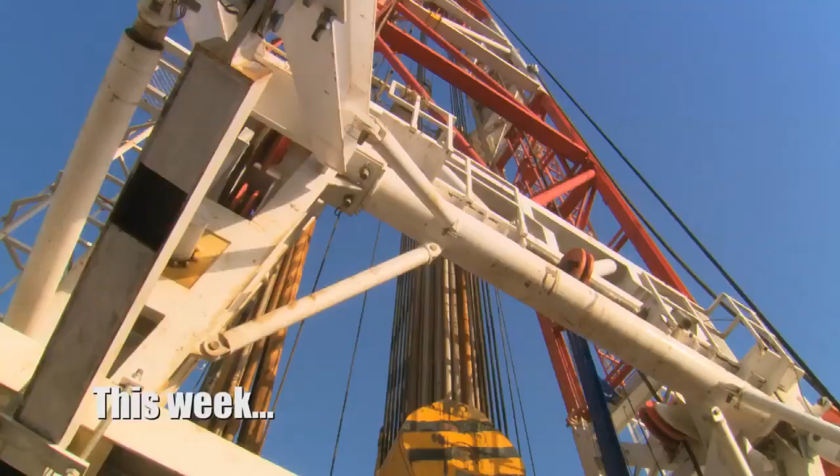It's the toughest job Russian oil giant Lukoil have ever taken on. Below ground, one of the world's largest remaining untapped oil fields. Above ground, a whole infrastructure that must be built to get the oil pumping.

You put your attention on this area. Yes, okay, that's good. But you forgot about others.

With inexperienced crews: Bring it back! You can't come up! You're crazy!

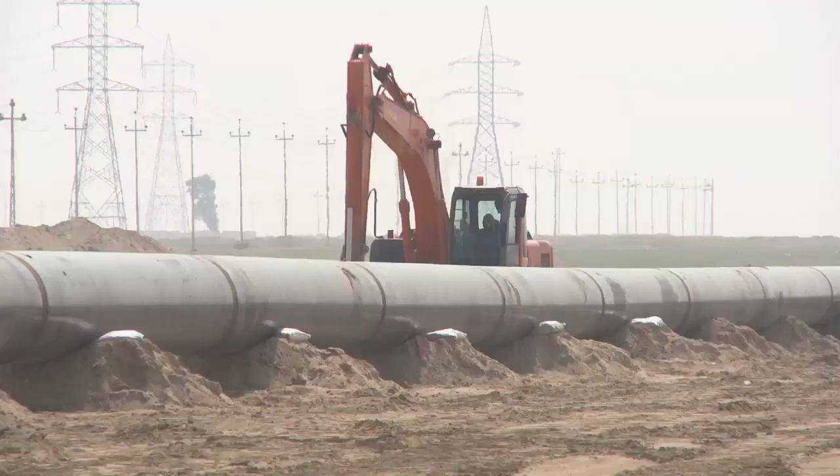With vital equipment held up in port. Your inspector is sitting here without any welding tools.

Battling contractors who are falling behind schedule. Talk it through, find out what the answer is and make it happen.

In one of the most hostile environments on the planet. Any type of incident happens en route, i.e. small arms fire, you'll hear a shout from the front to brace, brace, brace.

And they've got to get the oil pumping in record time.

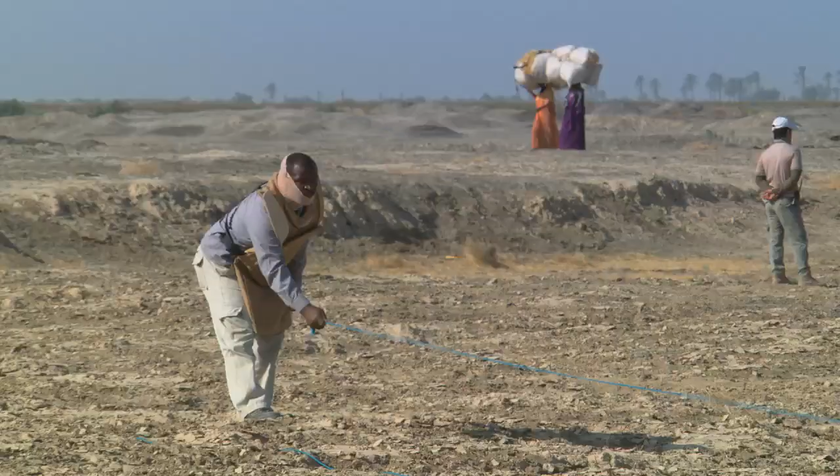It's early January 2013. This is Lukoil's West Qurna-2 oil field near Basra, Iraq. It has an estimated recoverable reserve of a staggering 13 billion barrels. Once up and running, it'll be enough to keep this oil field pumping for 25 years.

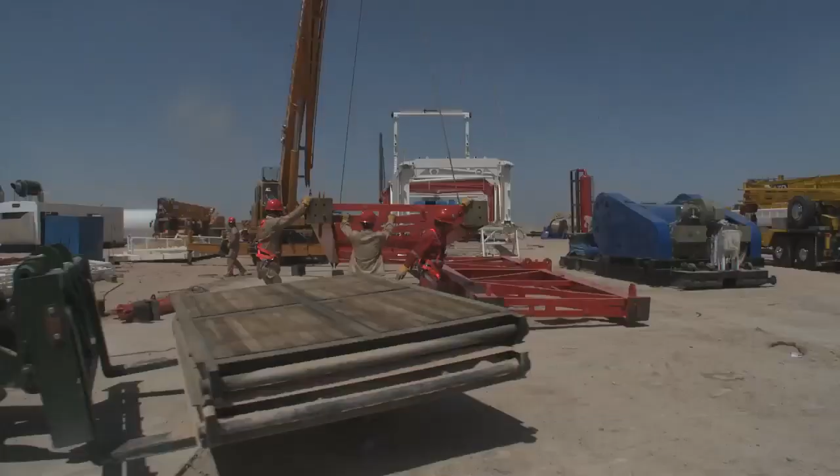It's just 10 months before Lukoil must produce what's called first oil. That's the date in November when they must pump their first batch of 150,000 barrels per day.

Lukoil are building everything on former marshland.

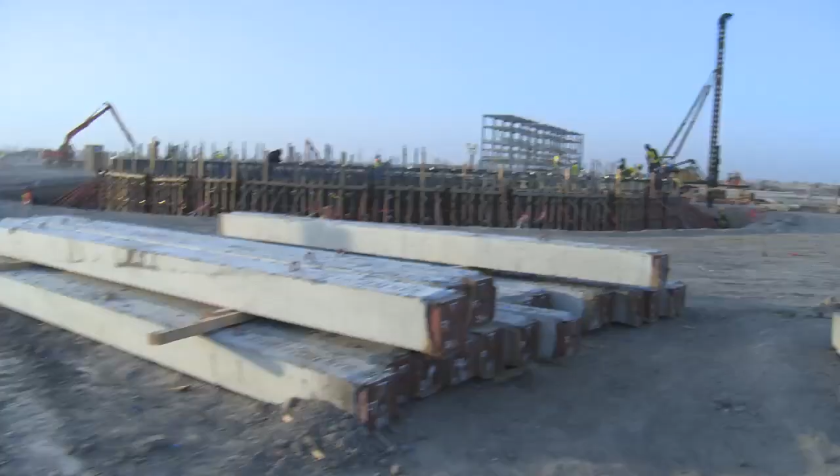So this is the phase 1 on-spec tank. Tell me about the schedule - is it on schedule or not? This one is a little bit behind schedule actually, isn't it? A little bit, how much? What's your expectation? As for tanks that we can catch up, 2-3 weeks behind, especially the second priority tanks. Our furthest advanced tank for this area is the first off-spec tank, which has the template installed, and we're ready to now pour the ring wall.

Sergei and his colleagues are inspecting the site of what's called the Central Processing Facility, or CPF.

The CPF is the beating heart of the project. Its scale is enormous - it covers a site 2.5 kilometers square. It uses over 1,000 kilometers of cabling, and it contains 70 massive vessels in which the oil is cleaned of water, gas, salt and other impurities before being sent for further refinement, storage or export. When it's fully up and running, the CPF will be able to process 400,000 barrels of oil every day.

There was a delay here, yeah? Yeah, there was a slight delay because the orientation of the template on top wasn't supervised correctly and they had to reshuffle it - so we lost a week.

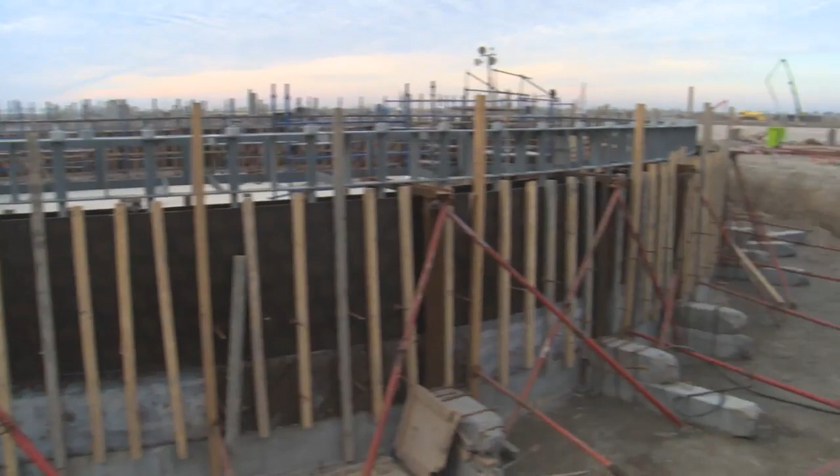Building the CPF will cost over $1 billion - the single biggest expense on the whole project.

You put your attention on this area. Yes, okay, that's good. But you forgot about others. You solve one problem, but you got another one.

They generally say that there's not that much delay. We're going to catch up.

Sergei and the Lukoil team are finding delays everywhere, including here, where water cooling towers that are used in the oil cleaning process will be built. The piles are in place, but the foundation has yet to be laid.

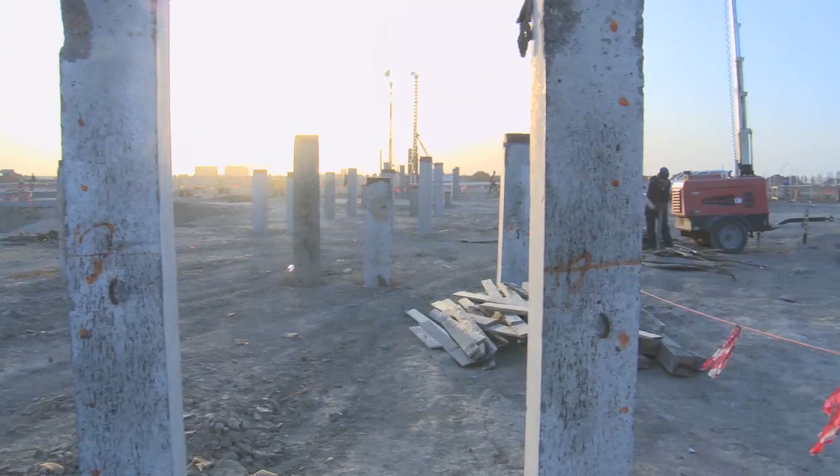All the equipment foundation, based on the delivery of the equipment, will be met - okay, so required on site. Yes. The major equipment arrives May, June. Yes, but starting from, as per the current schedule, from the late weeks of March, so we'll be prepared for the foundation.

It's time for Sergei to lay down the law. Tomorrow I kindly ask to report not in general - yes, each exact location, facility by facility. Yes, facility by facility. Yes, activity by activity. Yes. What is the situation in each site, okay? Yes.

This is the cause of most of the hold-ups: Umm Qasr, Iraq's biggest port. It's through here that almost all of the supplies for the oil field must arrive.

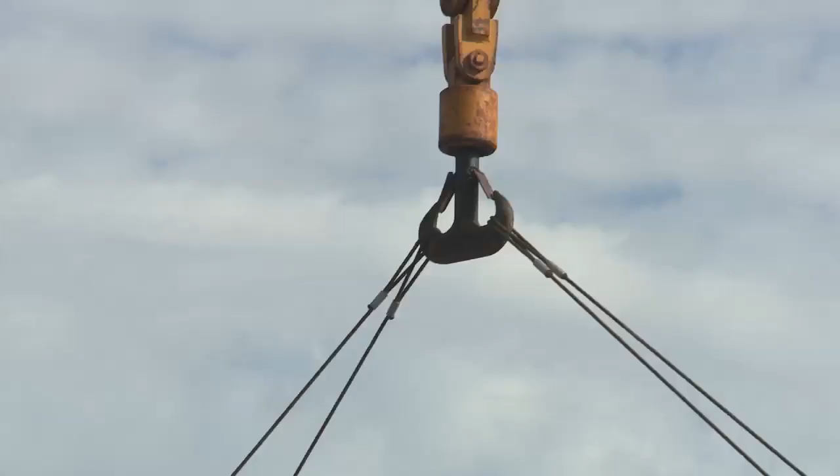This year alone, Lukoil will import 75,000 tons of equipment through Qasr. And not just Lukoil — Shell, Chevron and other major players in the oil industry use the port too. That's creating a major bottleneck.

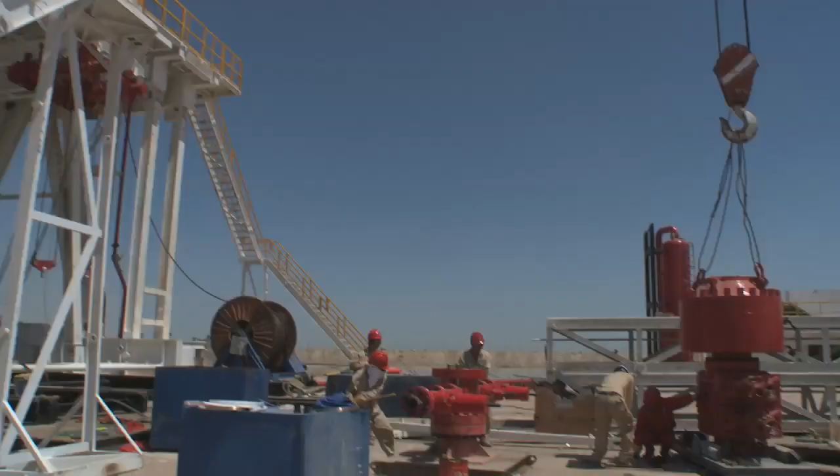One thing that is under the control of Lukoil is the speed of the drilling, but that's run into problems too. The guys are not drilling fast enough. The answer? Bring in 2 experienced rig coaches.

If anyone can whip the crews into shape, it's these two guys. Between them, Nordine Essahan and Herwert Dietrich have been working on oil rigs for over 50 years.

Nordine and Herwert set off to visit their rigs for the first time. These guys are the roughnecks, and they're new to the job. They're taking 50 minutes to connect each section of the drill pipe, a job that should be done in 4 minutes.

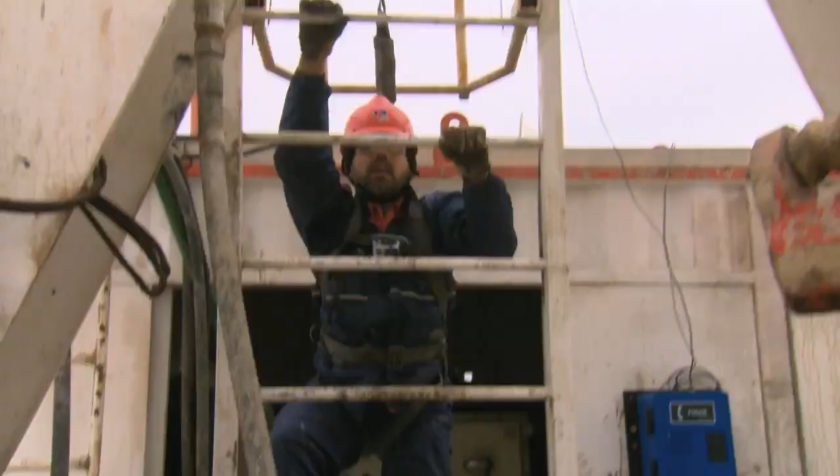This is the derrick, which supports the crucial drilling equipment. A roughneck climbs to the top — it's his job to get each new section of the drill pipe ready.

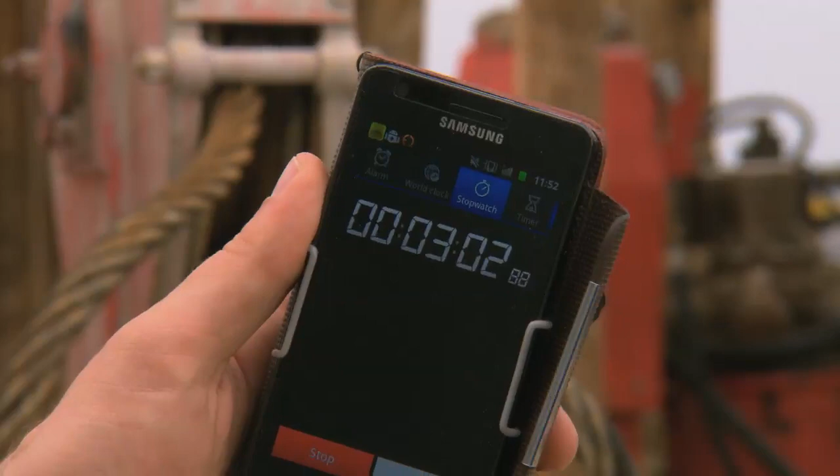100 feet below, the drill pipe is manoeuvred into position. Time they're doing good, they're following my procedure, they're listening. Power tongs will screw the two sections of the drill pipe together.

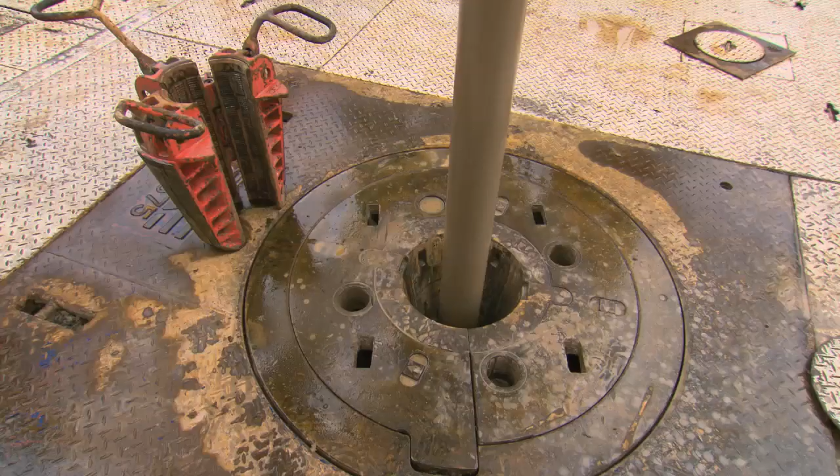It comes in 5 minutes. Under Nordine's expert direction, the guys have made extraordinary progress, but it's still not good enough. We have to do the connection faster to save money.

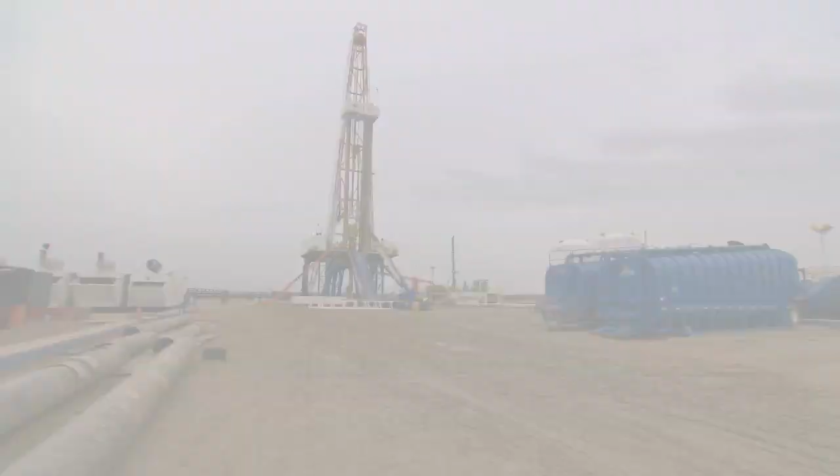On Herwert's rig, the crew are already 8 days behind schedule, and they still haven't completed their first well. And now the guys have run into a major problem.

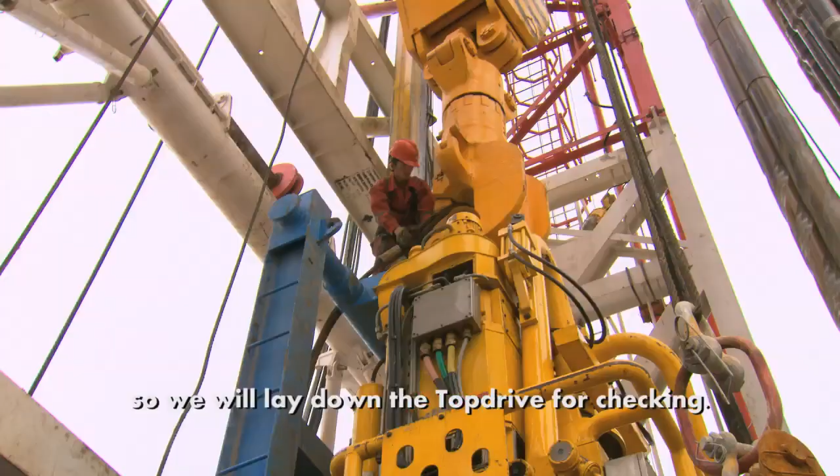The drill is powered by a huge motor called the top drive, but the gearbox on the top drive is broken. We have a problem with the top drive — he will not rotate, and we will lay down the top drive to check him.

First, a pulley lowers the top drive to the rig's floor, then onto the ground. A team of mechanics will then open it up to see what's wrong.

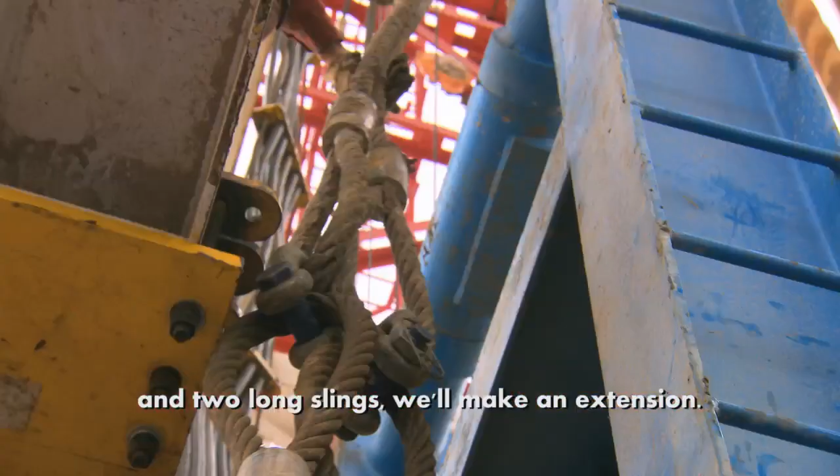Okay, slowly up. Yeah. Okay, now the other one, this one.

When it falls down at height, 20 meters, maybe more than 100 tons — when it touches the rig floor, we will kill the people, the equipment will break down. The team proceed with caution. Lukoil insists on safety first on all their rigs.

It's a 15 ton sling, we have here 30 tons, also double safe. So Hervart needs to check the crane can take the load.

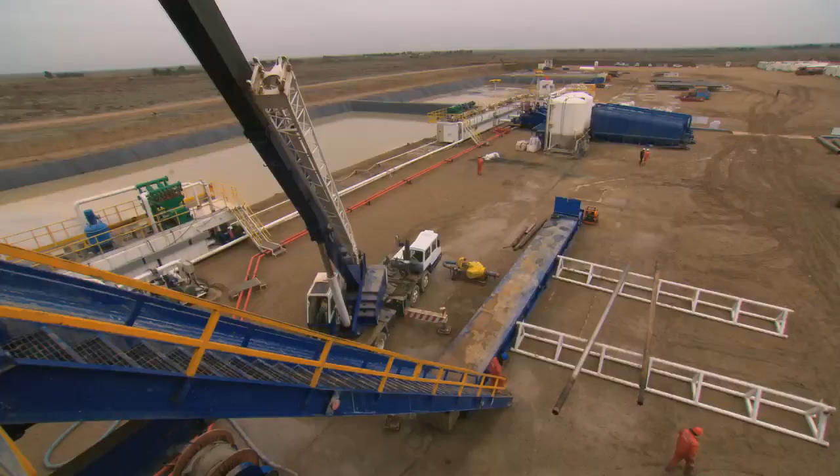You can see here, this one is a digital weight indicator. It's a very important gauge — we will see the load, the weight from the load. And when this is not working, we will not use this crane. It's very important, they need to get a new crane. But in Iraq, something as straightforward as ordering a new piece of machinery is never that simple.

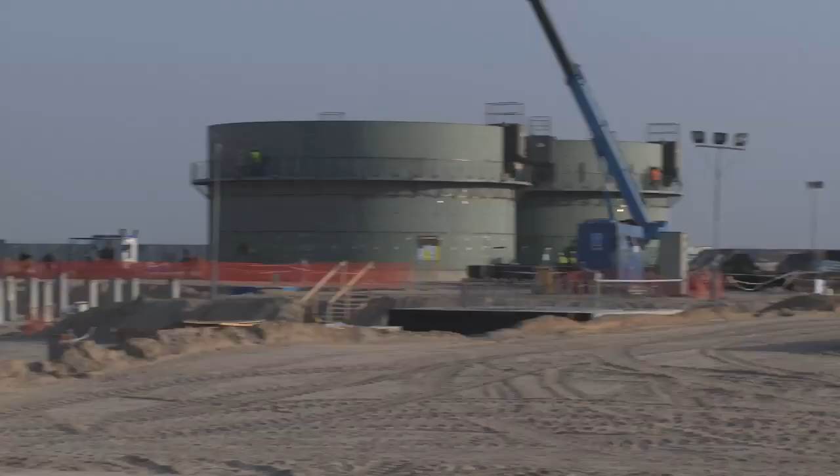Lukoil's giant West Qurna 2 field is one of the most ambitious projects ever attempted in the oil industry. Providing the power to get the oil pumping is going to take a colossal amount of power. With no existing infrastructure, there's only one thing to do: provide your own. A huge power plant is being built on site. Gas and air will be heated inside 3 enormous custom-built turbines to generate electricity.

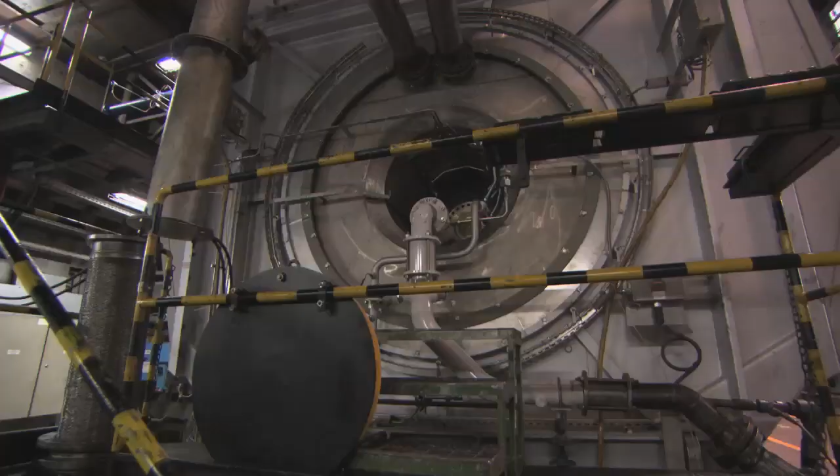Florence, Italy. It's where the first of these 3 turbines is going to be tested. We're going to check the vibration, we're going to check the temperature of this machine, and we're going to prove that what we have designed is working perfectly, and we deliver what we are promised. The turbines earmarked for WQ-2 are so powerful they could provide electricity for an Iraqi city of 100,000 people.

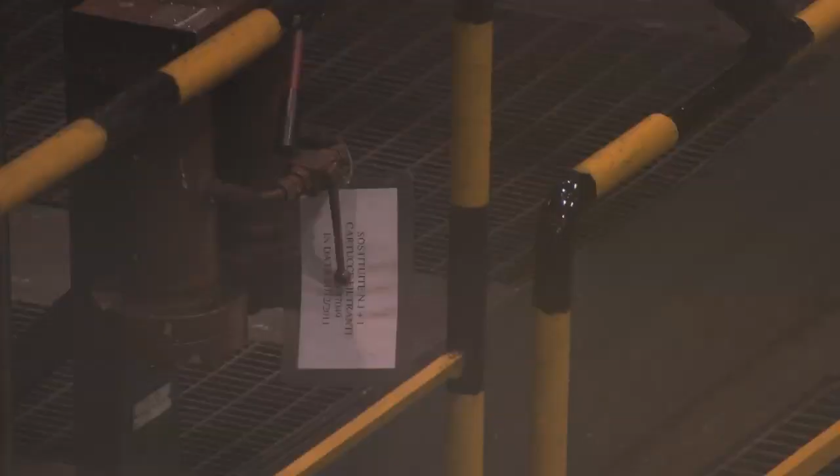This is the first time the turbine has been switched on. If it fails, the whole project at WQ-2 will be delayed for months. You can see from the silence, we are all a little bit... I'm waiting just for this fatidic moment.

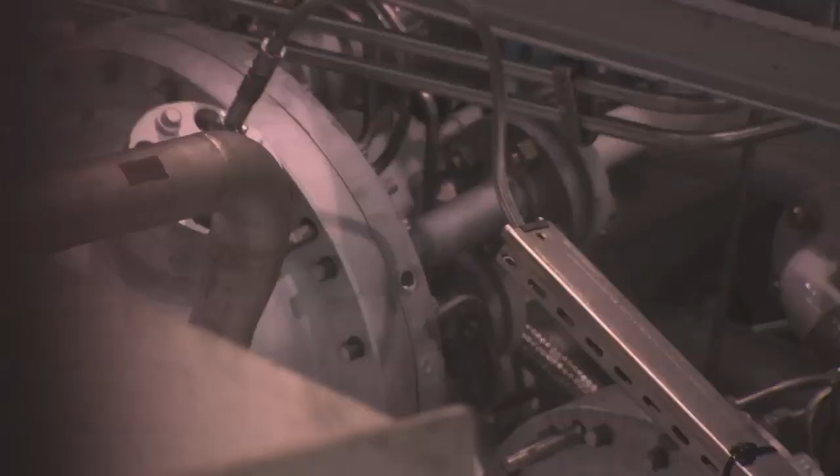The first test the engineers carry out is for speed. The turbine must reach 5,163 revolutions per minute. It's a success.

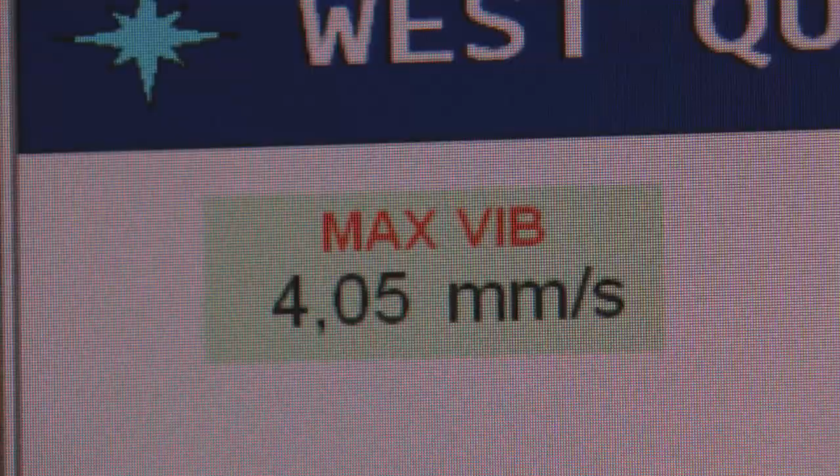Now they must test for vibration. If the turbine vibrates by more than 6 millimeters per second, that will mean failure. To pass, the turbine must run at top speed for 2 hours. They've done it. One done, 2 more to go, so it's quite a nice feeling.

Soon the turbines will be dispatched to Iraq. Lukoil are one step closer to meeting their deadline. The acceptance.

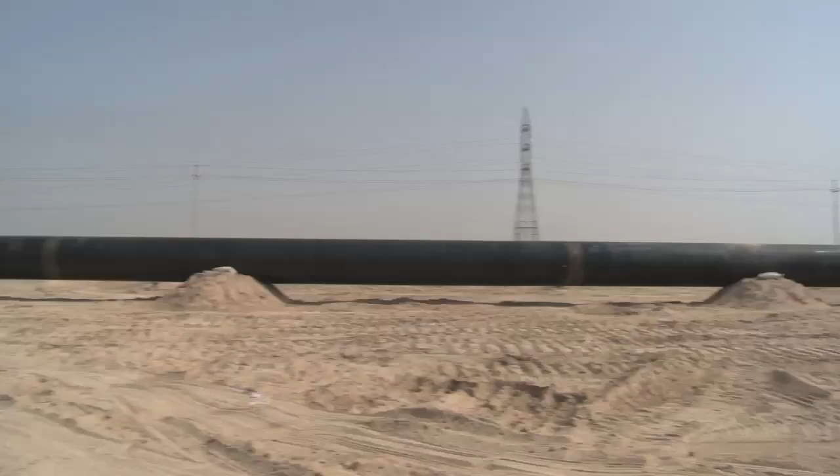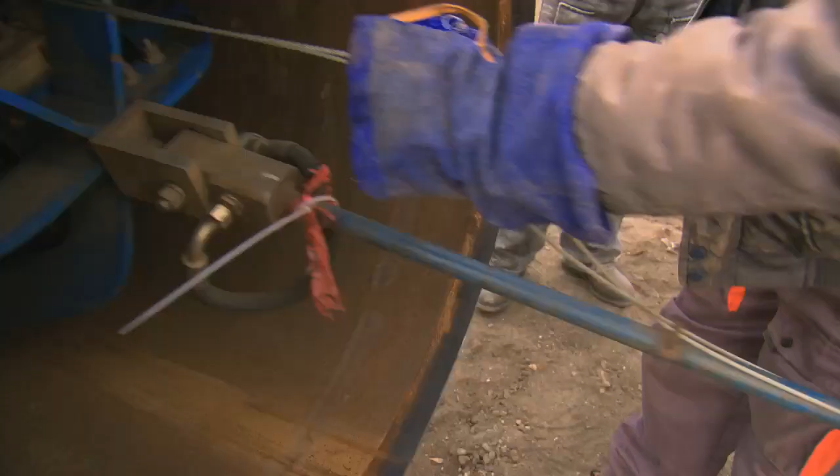But back in Iraq, not everything is going to plan. A team is currently building the pipeline that will move oil from the central processing facility to enormous storage tanks for export. The pipeline will run from the oil field and under several water channels, and then beneath the mighty river Euphrates. After that, it dips under the main road to Baghdad, before heading for the storage tanks at the Tuba Tank Farm, 105 kilometers away. To get the job done, the team uses high-tech Italian automatic welding kit alongside its manual crews. With the flick of a switch, it welds together up to 100 sections of pipe every day.

But the machinery is held up somewhere in the docks at Basra. The team are going to have to do everything the old-fashioned way, by hand.

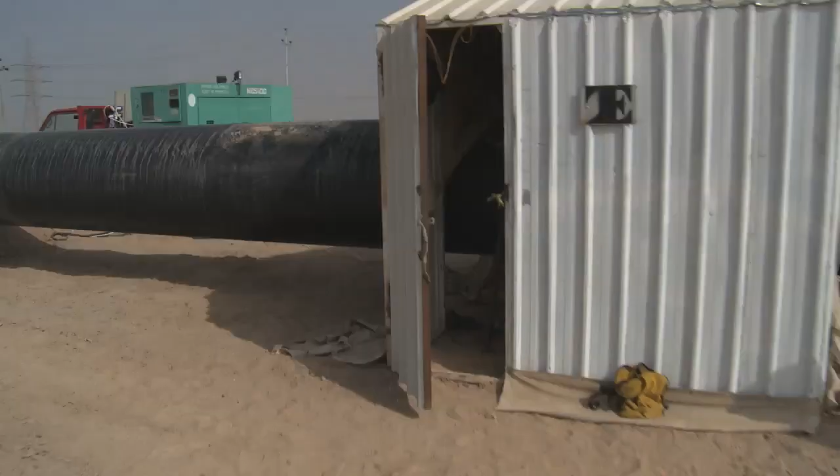Sohaib Tariq has come to check on progress. Good afternoon, guys. Today, what's the number of these joints now? This is the number of that one, 11. We expect average daily production for this crew to be 20 welds per day. Is that correct? Yes. Okay, guys, that's good. Anyway, we are looking for more, basically. Progress is very important. However, we need to maintain a good quality as well.

Delays at the port are not the only problem.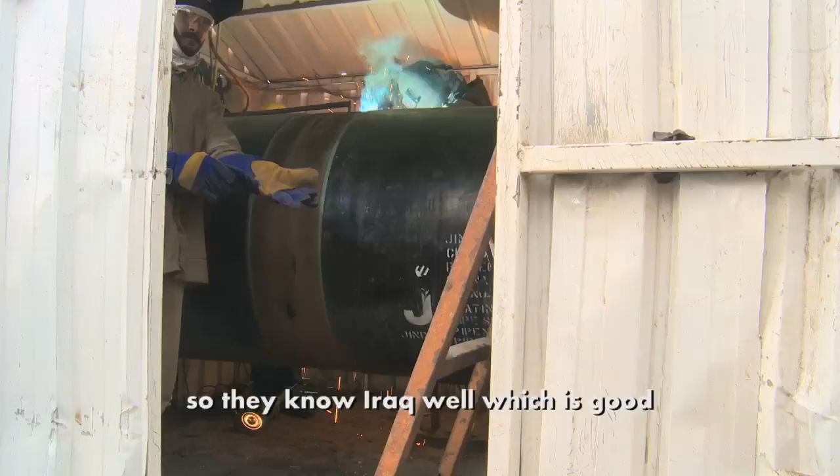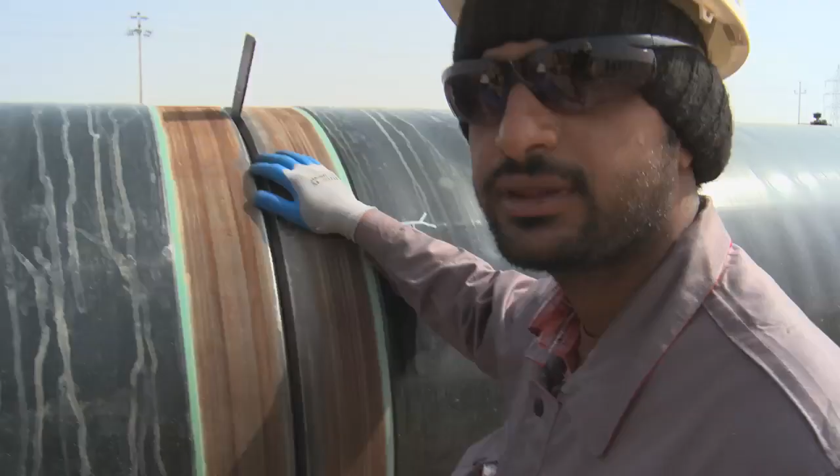And where is the welding foreman? Your inspector is sitting here without any welding tools. He's a welding inspector. He's supposed to check the fit up of the joint, to make sure that the fit up is per the welding procedure before you commence welding. Is that correct? Yes. There's only one thing to do. I would suggest that you do not start welding here till you talk with your QA/QC manager. Let him bring the welding tools, the welding inspection tools, before you start welding here. All welding is halted.

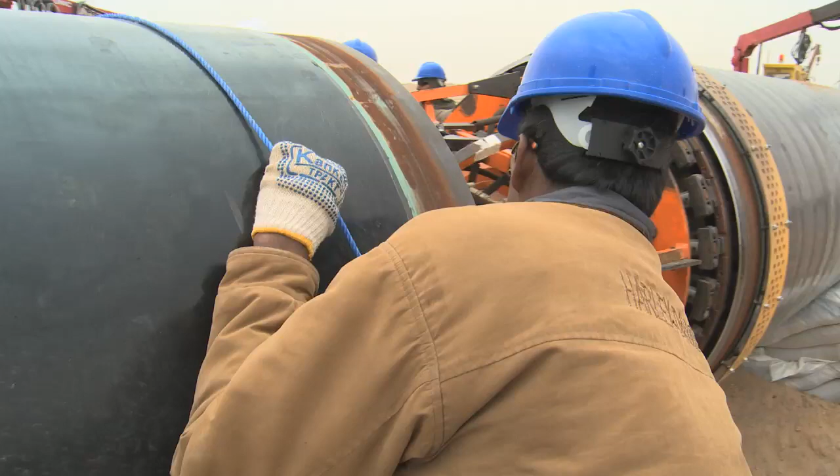Before they can go any further, every weld done today must be checked again. I'm very disappointed, basically, because a welding inspector without welding tools doesn't make sense. And this will just cause delays to the welding. Time is of the essence because the scale of this project is mind-blowing. Lukoil are managing the whole project from an office in Dubai.

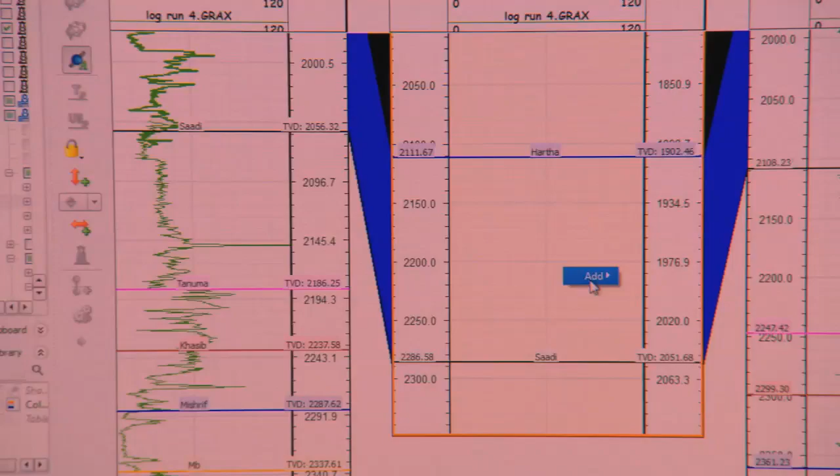This is the Integrated Drilling Operations Center, monitoring and coordinating drilling operations in Iraq. This is a state-of-the-art operation where every second of drilling on every rig is closely monitored 500 miles away. All operations are monitored 24/7. Everything is recorded, all the drilling parameters, what is happening - we have all the things transmitted here in Dubai.

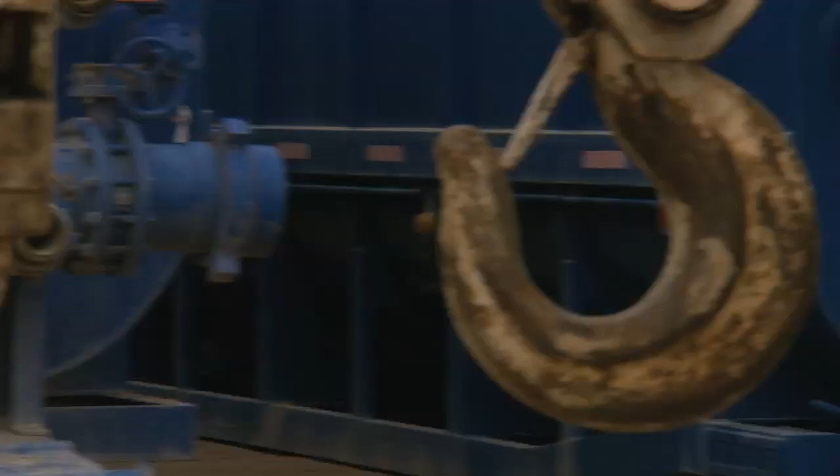The Dubai office has stepped into the breach and found rig coach Hervart Dietrich a new crane. Already several hours behind schedule, Hervart hopes the guys can now catch up. The crane is here, I'm feeling very good. The crane, I think, is in good condition. He's in the right place, and now we can start with the work.

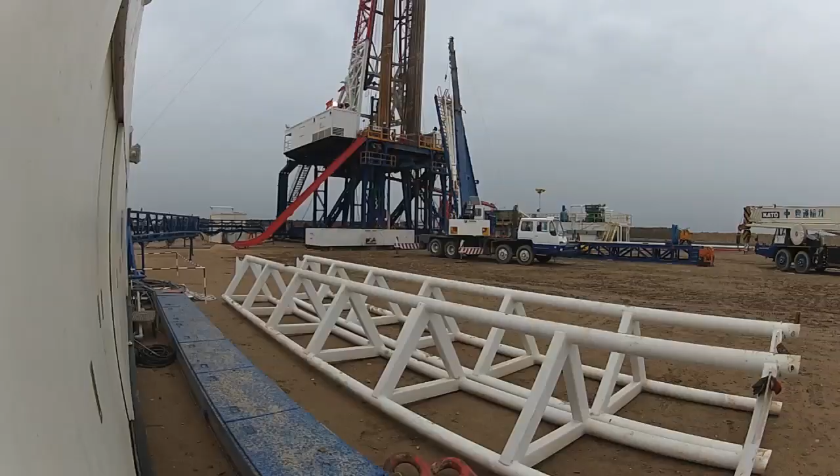The first task for the crane is to remove the pipe ramp. That allows the crane to get as close to the rig as necessary. You do the job well, yeah? No problem. It's now that the job really begins. Hervart knows the correct procedure for doing it quickly and safely.

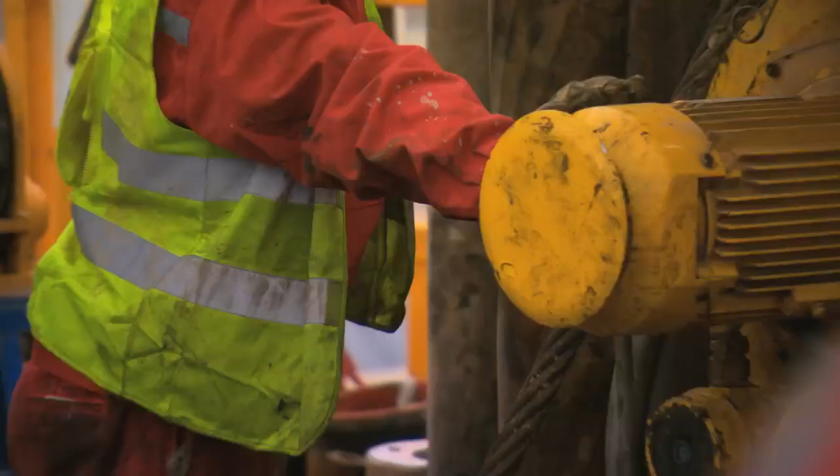Hervart is called away for an urgent meeting. While he's gone, the crew come up with their own plan, which they hope will save time. They disconnect the travelling block from the top drive. They're going to use the crane alone to lower the top drive from the rig floor to the ground.

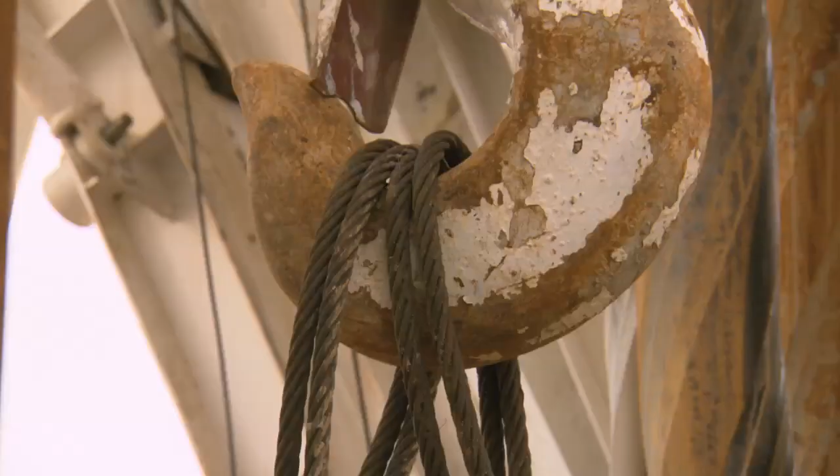Hervart's back and realises the crew have thrown out his tried and trusted method. I ask you, why did we connect the fixed link on the travelling block? For what? For nothing. Now we've worked here three hours for nothing. And nobody will follow my order.

The crane driver will change the program - he will pick up directly with the crane. That is not the normal procedure. Bring it down with the travelling block, please. Easy, one crane is enough, lower down in one. He'll bring it one step down. Okay, when it's light, we can do it. I'm not a crane driver.

The crew's boss has persuaded Hervart to let them do it their way, although Hervart doesn't sound particularly convinced. Now he can do what he wants. Yeah, we'll just watch them and see.

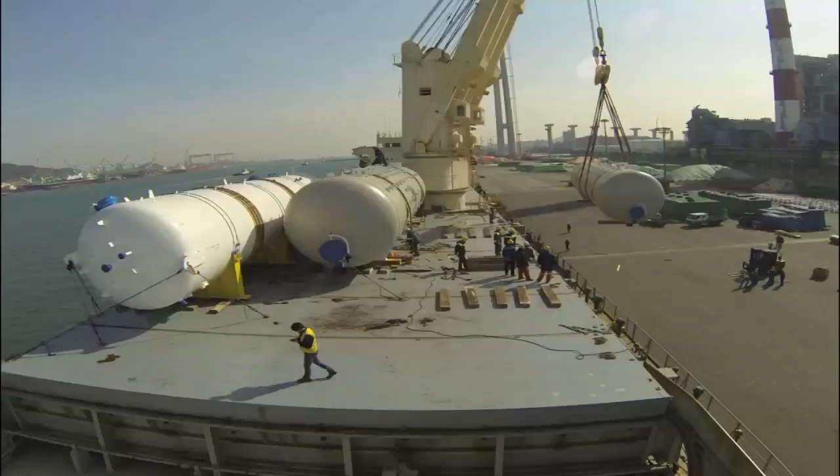Hardly any of the equipment for the oil field is made in Iraq - almost all of it must be imported. Keeping track of their overseas subcontractors is a massive logistical challenge for Lukoil's managers.

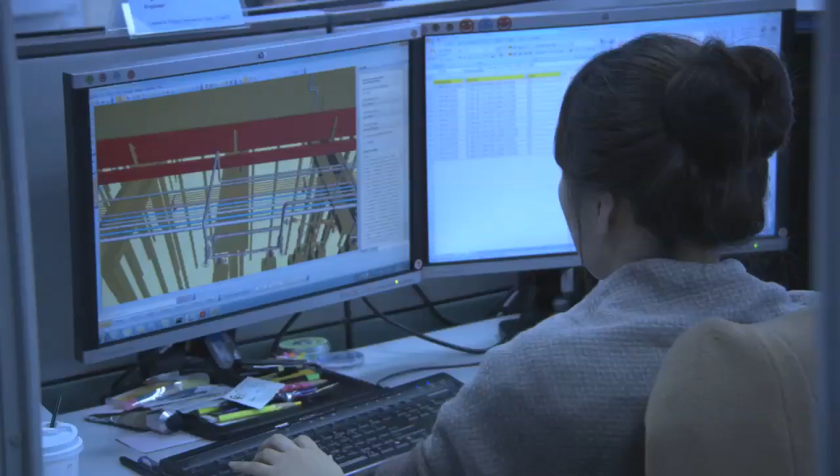Seoul is home to the multinational conglomerate Samsung. Samsung won the contract to design and build the Central Processing Facility, or CPF - the enormous installation at the centre of the site that removes impurities from the oil. They were considered to be the most technically competent, had the best name, so that was how it was decided. There was more to it in technical evaluation, of course, but bottom line is they were seen to be the best bid.

Lukoil have a permanent team of 60 people based in Seoul to ensure the project is delivered to their specifications, on budget and on time.

Project manager Mark is worried that Samsung have made too many cutbacks in order to get the job done on time. You've actually cut this to the bone, which means when you put the dance floor in and the welding machines in and the pipe in and all the personnel standing on that dance floor, you will deflect and deform some of those beams. You need to identify which cross members need to be replaced or strengthened, and they need to know that now.

Mr. Vladimir, we are waiting for... Don't hang around waiting for Vladimir to tell you it needs to be done. I'm telling you it needs to be done, so please get on that. Talk it through, find out what the answer is, and make it happen, please. This is a schedule-driven project - everything is schedule-driven, from deliveries to procurement to construction, it's all schedule-driven.

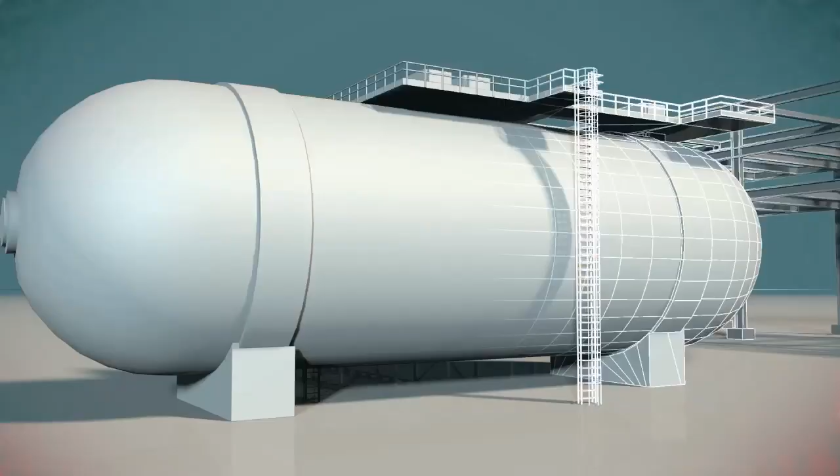Lukoil's chief mechanical engineer, Pavel Denshikov, arrives to oversee the final stages in the manufacture of the vessels. There are 9 of these vessels. They sit at the heart of the CPF, where the salt, gas and water from the crude oil is removed.

The vessels are welded together. Each one contains over 50 separate welding joints. But that creates a problem: welding weakens the molecular structure of steel, and that might lead to the vessels developing a leak. And on any oil field, leaking oil and gas is a huge threat to life and limb.

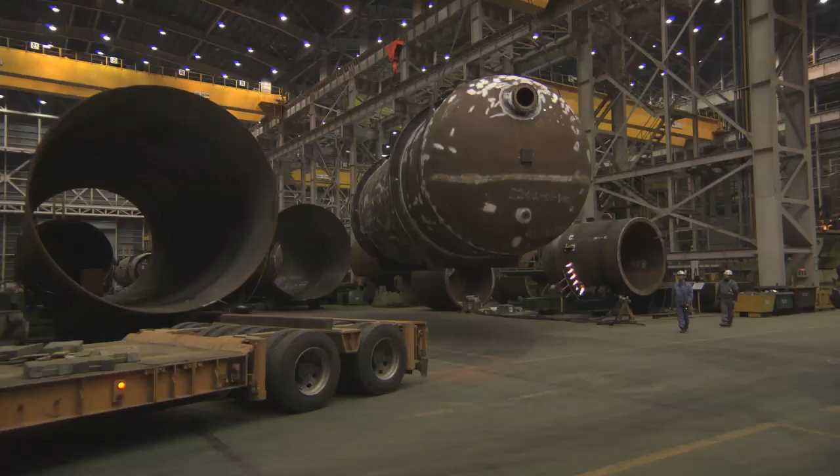There's a solution. It's called post-welding treatment. Heating up the vessels in a giant furnace restores the molecular structure of the steel to its full strength. The vessels are placed on the back of a custom-built trailer for the journey to the furnace. It takes 30 minutes to travel 300 meters. The vessels will be left in the furnace overnight at a temperature of 625 degrees centigrade.

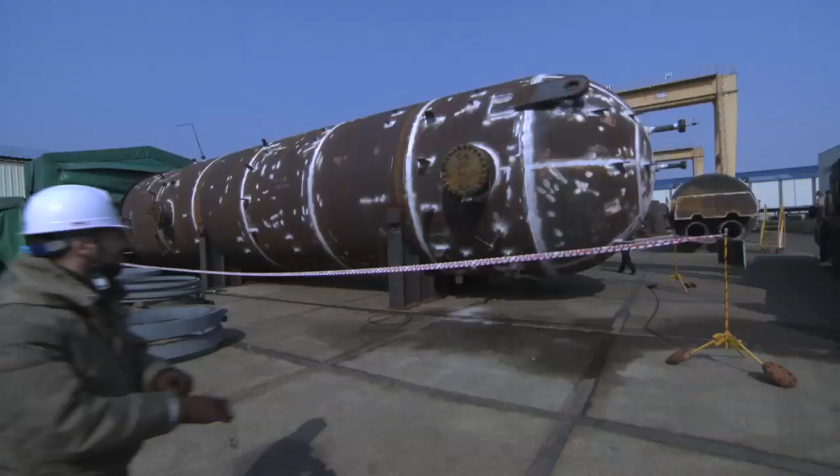It's 8 o'clock the next morning, and Pavel has returned to see if the process has worked. Water is injected into the vessels to test for leaks. The pressure is raised.

We do these pressure tests to check that the whole body and all welding joints are okay - no leakage, no any damage, no any faults. Each of the 50 plus welds needs to withstand that pressure.

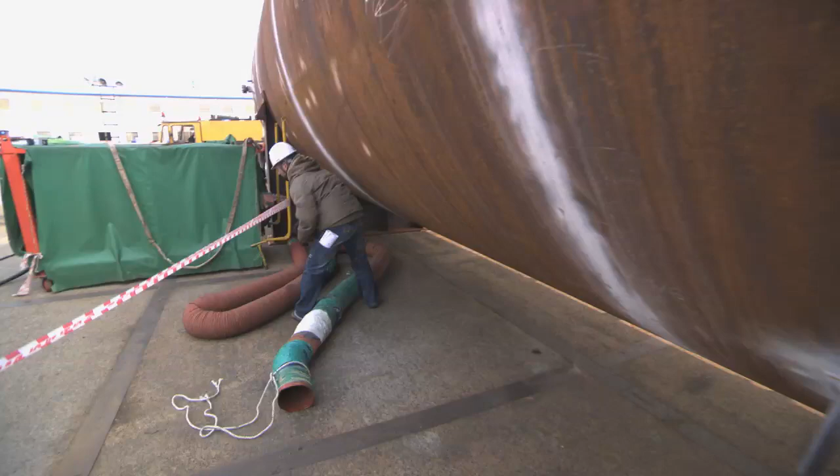The pressure is raised once again. It must remain constant for 20 minutes to pass the test. It's holding steady. It's almost finished. Now we are going to drop the pressure to 0 and check all welding joints one more time, because from time to time after the pressure drops, some leakage could be found.

As the pressure drops, Pavel takes his final measurements. The test was done perfectly. This vessel has passed with flying colours.

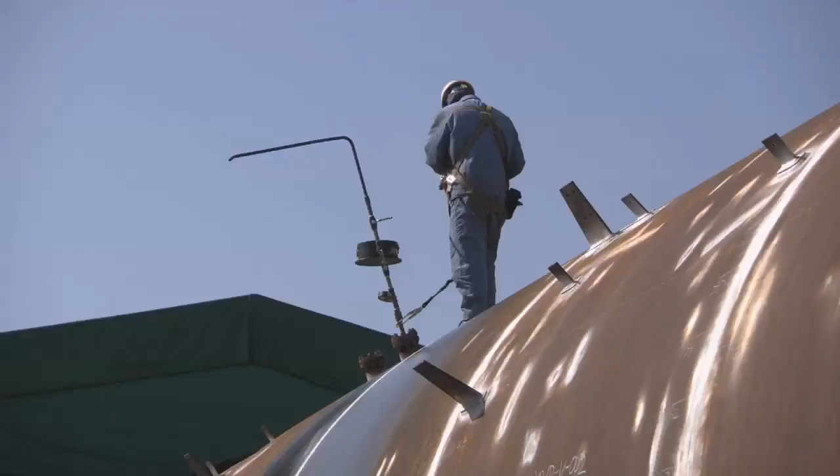Hervart's Chinese crew are taking a long time to take down the top drive, because they insist on doing it their way.

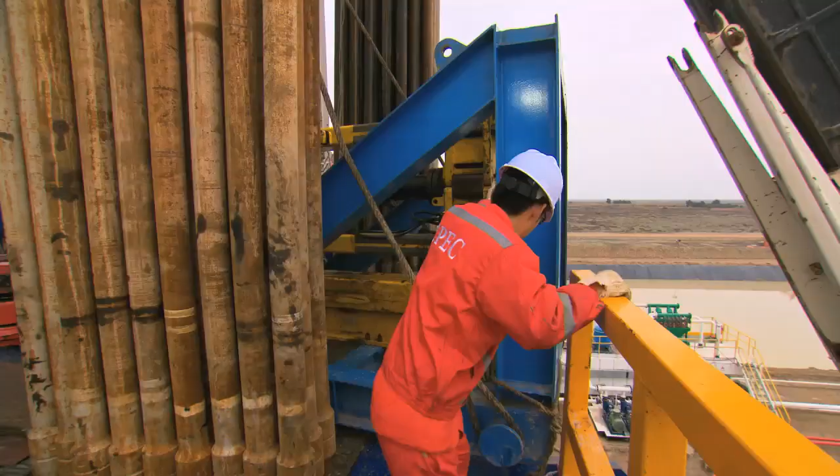The crane operator starts the lift. He's going to try and pick the top drive up from the rig floor and place it straight onto the ground. But the crane is too close to the rig - again. At this position, he must not lay down the top drive.

I see the Chinese crew have no experience, none.

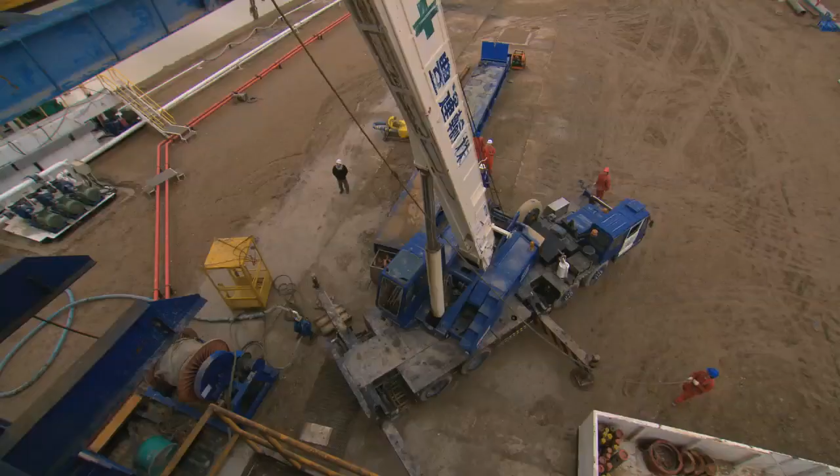I cannot understand. If you sent this procedure by my company, we'll fire it immediately. But Hervart doesn't have that option. He must get on with the job at hand. People cannot see the problems.

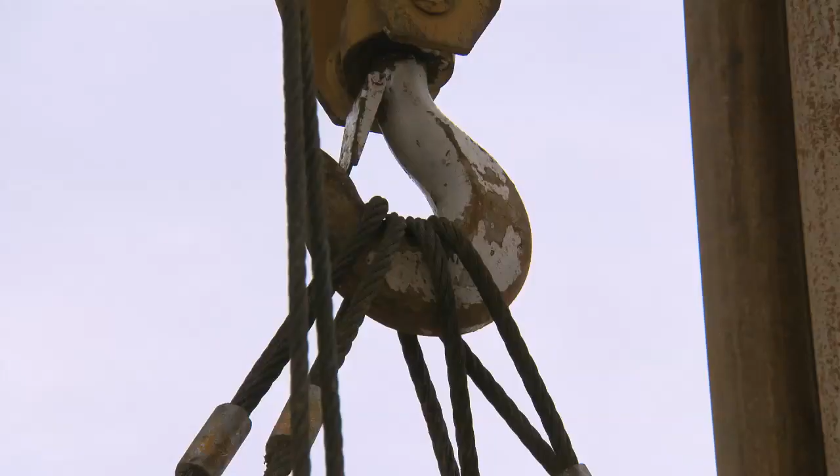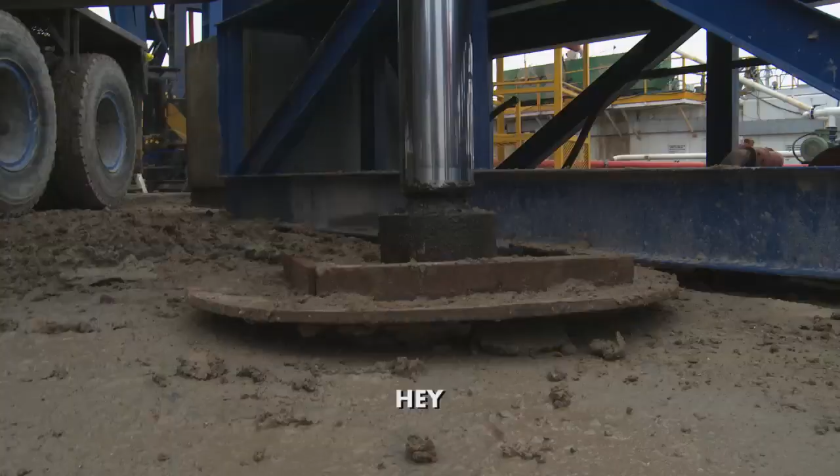And then, disaster strikes. Hey! Stop! Stop! Down! You come up! You come up! Bring it back! The crane come up! You're crazy! Hey! Bring the crane! Bring it back! Immediately! Bring it back! The crane will come over. Safety officer has stopped the job. Bring it back! Immediately!

It should take around 1 hour to remove a faulty top drive from the rig, but 5 hours have gone by and the job is nowhere near finished. Hervart decides to call a crisis meeting with the rig manager.

This morning we discussed this. Yes, and we say okay, we'll do it in this way, step by step. And we prepare everything to do it. And suddenly we change to another plan.

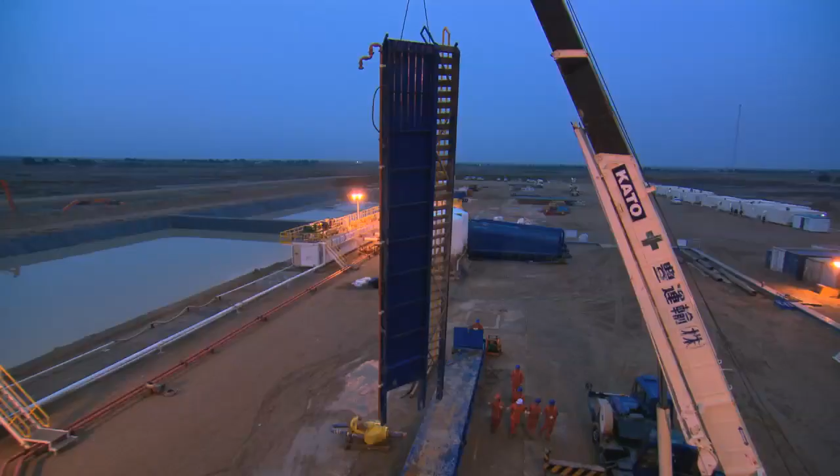They agree to go back to Hervart's original plan. The top drive will be removed by winching it down a ramp, and not by the crane alone. Night has fallen. The pipe ramp is reconnected to the rig. The top drive will be guided down this ramp by the winch. The crane will only be used to steady the top drive as it descends.

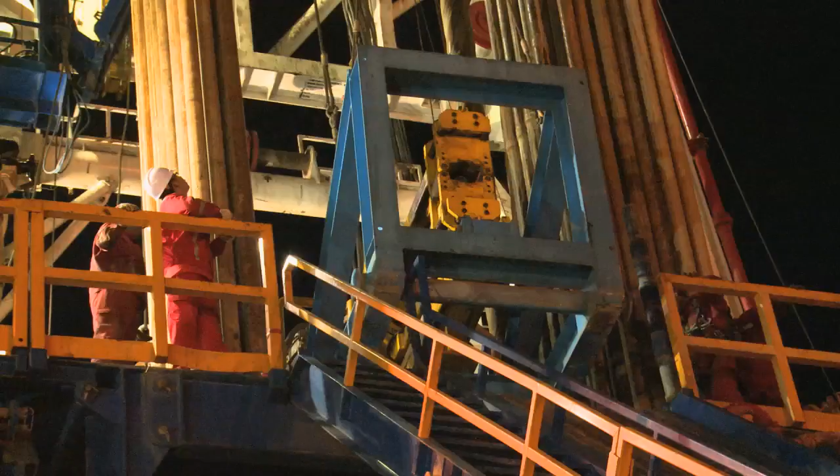But the crew have forgotten to attach the winch, and now the top drive is stuck.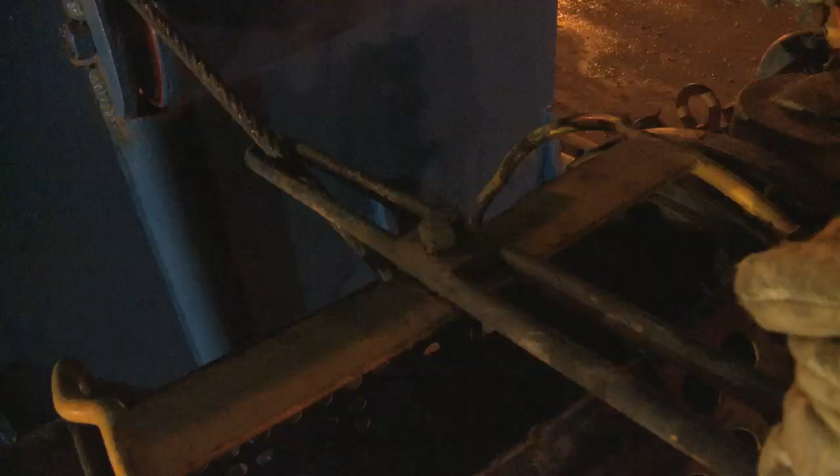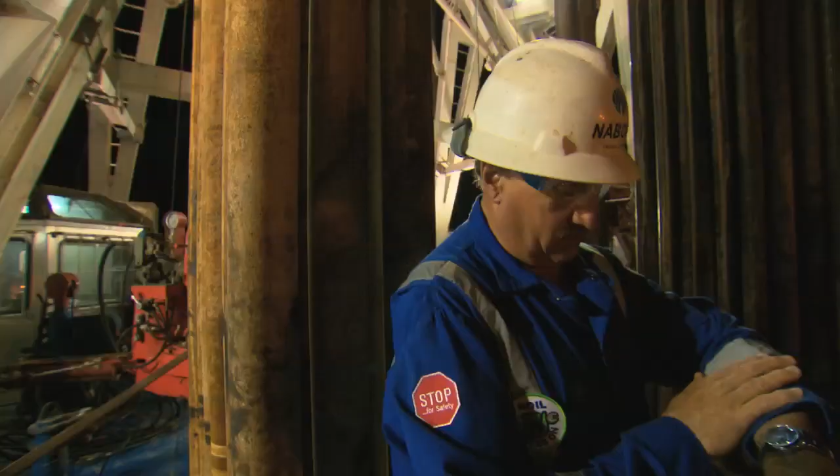25 tons of kit is lowered to the ground. Finally, it's down. Nearly 7 hours. Well, nobody followed my procedure from the beginning.

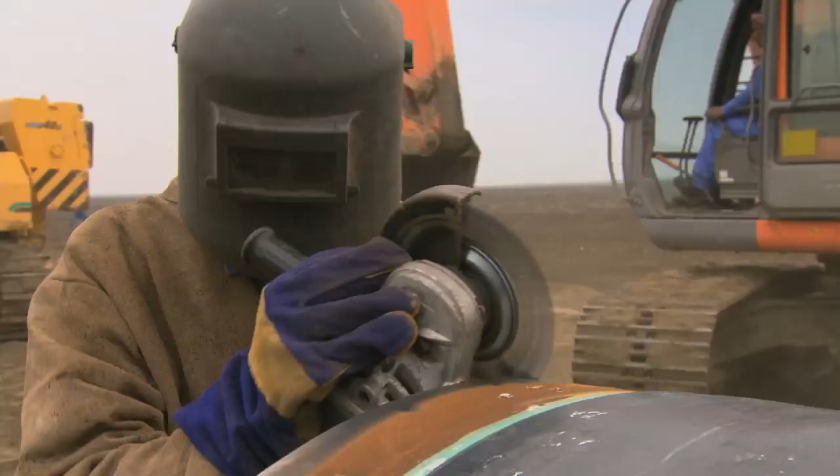Meanwhile, the team building the pipeline to take oil to the storage farm has run into another hold-up. The guys are also battling the winter weather and the local terrain.

The problem we run into here is about 1.5 meters down, you get a very dense strata. Water won't penetrate it. Two months ago, when we went up to the canal, you look east, you look west, it was just like what you see here, flat, dry. After the December and early January rains, you look east, you look west, as far as you can see, there's about 0.5 meter of water in every direction.

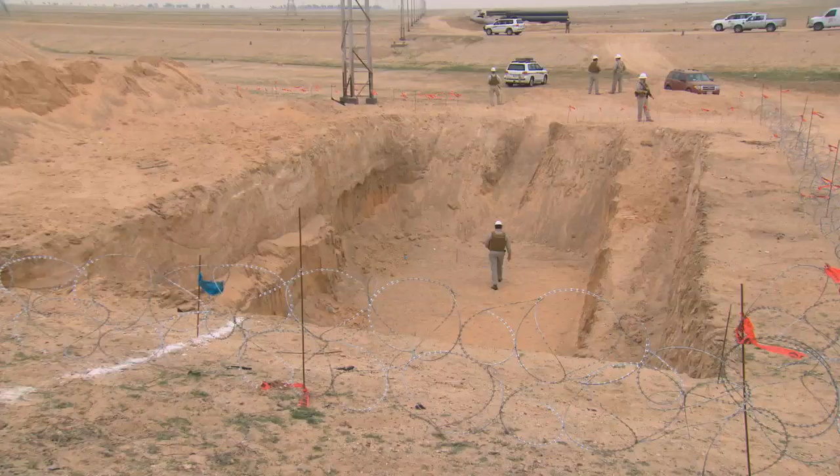These problems are affecting the team building the pipeline from the oil field to the storage tanks in Basra. This is the main road between Basra and the capital, Baghdad. It lies directly across the route that the pipeline will take. The pipeline has to go underneath.

These crossings are paramount to us. We need to get them out of the way because there's a lot of them. But permission to dig under the road requires a permit from the Iraqi authorities, and that's held up by red tape, leaving the excavations exposed to the elements.

Yeah, we're in the season that we're in right now. It's paramount that we do not leave excavations open for too long. Where we've had excavations open on the northern side for only 7 days with no rain, the water table is high and the sidewalls were collapsing.

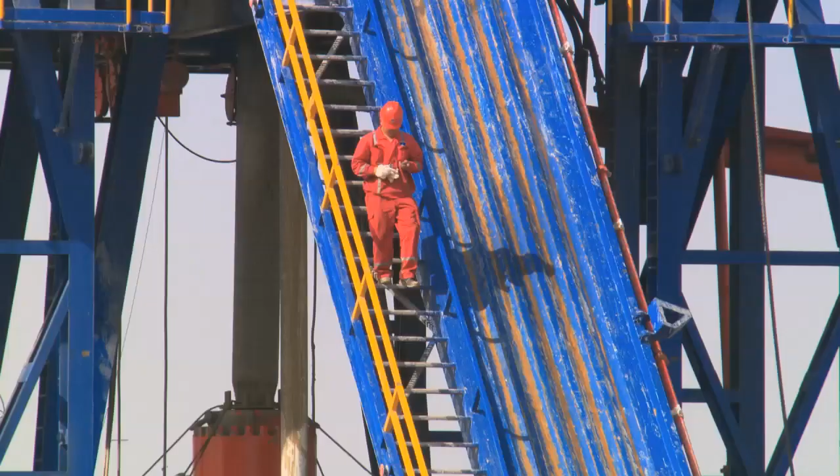It's early morning on Hervar's rig. The guys have finally got the faulty top drive down. But it's bad news, it's beyond repair. They'll need a replacement. If the parts are available, it won't take a long time.

The workshop is not too far from here, but it can take at least 2 weeks. We'll get it on the side. Yeah, the spare part is held up in the port at Umm Qasr.

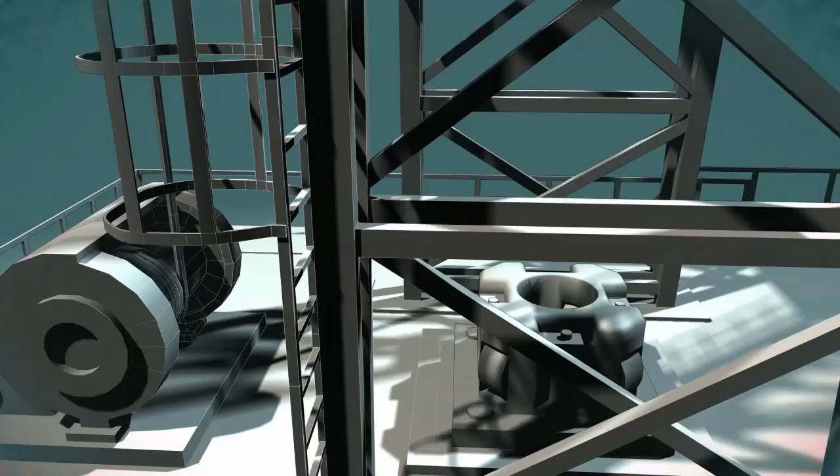There is a temporary solution: use a device called a Kelly. The Kelly is connected to the drill and is turned by the rig's engine. It's a substitute for the top drive. Trouble is, it's much slower and the guys are days behind schedule.

Hervar calls in his fellow rig coach Nordin for help. When we're drilling with the Kelly, the full section to run casing, we need you here full time. Okay, no problem, this is important. No problem, without you I will not do it.

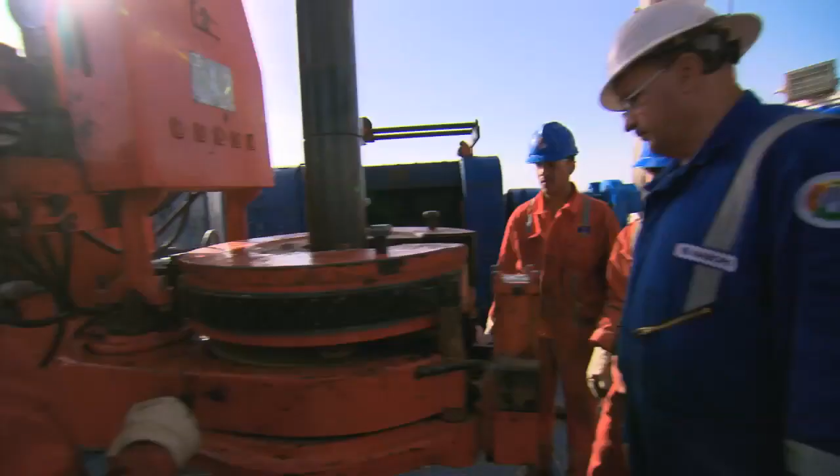But when Hervar returns to the rig, he's in for a pleasant surprise. The Chinese may not know much about the top drive, but they have used a Kelly before.

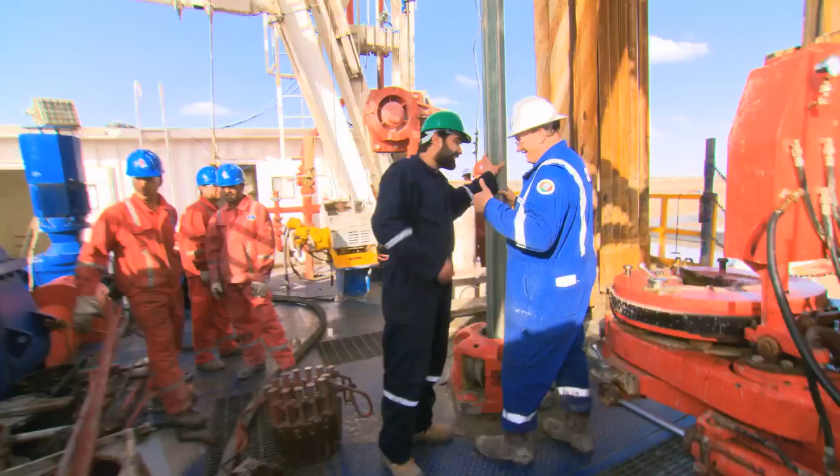Our Chinese crew, I'm feeling good. We have for sure no problem when we drill with the Kelly.

If they can keep this up, they'll soon be back on schedule. I see a little bit of progress every day. Every day, 1%, I'm feeling good.

And there's finally good news at the pipeline. The automatic welding machines are through the bottleneck at Kasa and have arrived on site. They're capable of welding 4 times as many joints per day as a manual crew.

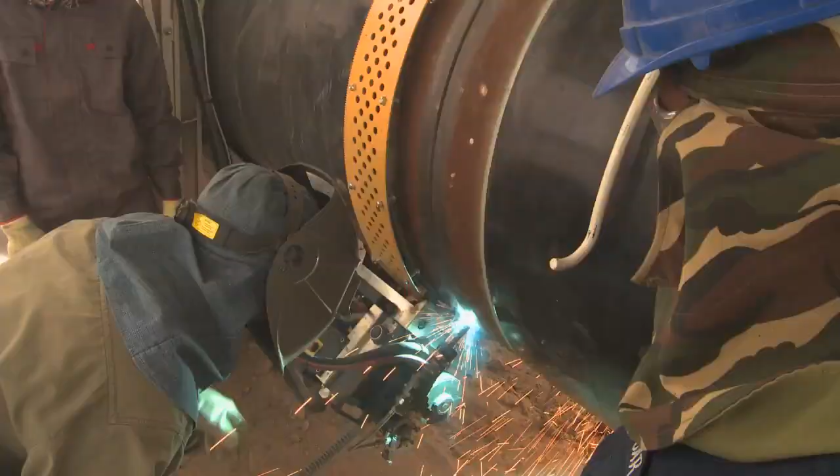Project manager Sohab has come to check on progress. Yeah, that's perfect. Looking at the weld finishing, it's very clear that the automatic welding quality is much better than manual. See the cap, that's the final pass. It's looking very clean, good, with a perfect finishing.

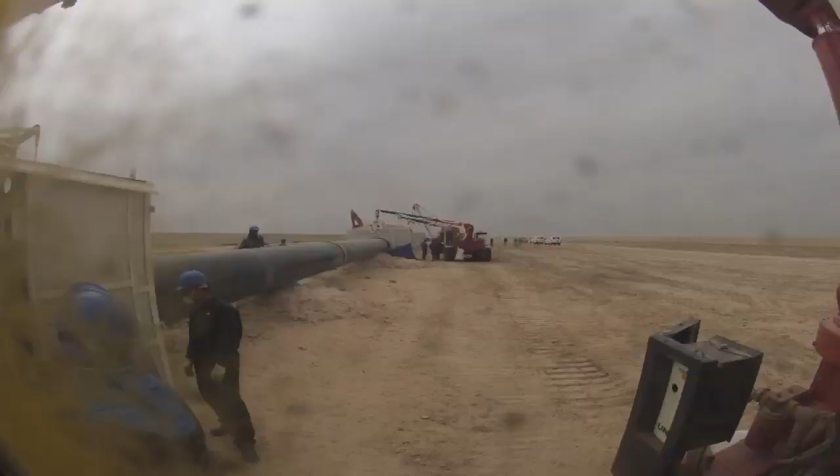And that's the advantage of automatic welding, that you get good quality, you minimize the repair and rejection rate, and there is no need for rework. There's almost 9,000 joints to weld if the pipeline is to be ready for November.

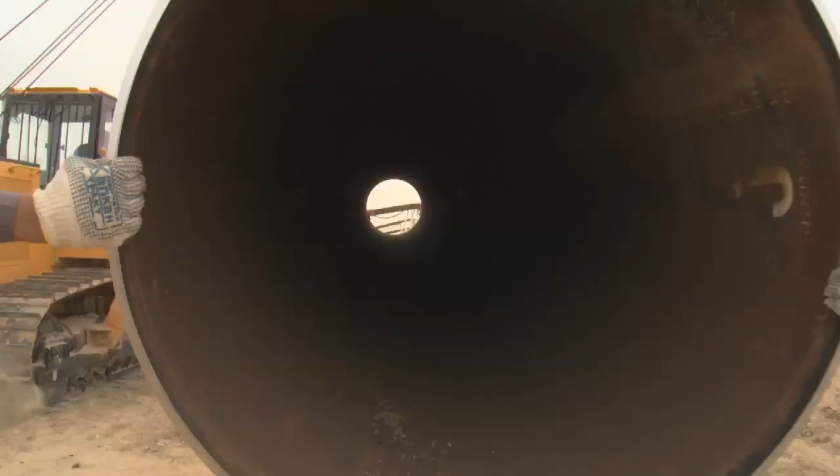But with the automatic welding machines up to speed, the guys are confident they can get the pipeline back on track. Lukoil are making progress towards hitting their deadline of producing first oil by November 2013.